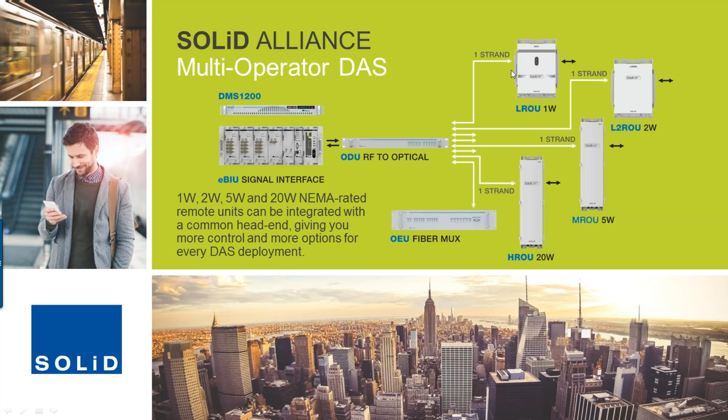This is a teaser for those of you who are familiar with Solid. This is a very, very preliminary spec at this point. What we're trying to also do is continue to evolve, as I mentioned earlier, and one of the common feedback that came out from the industry was about higher power amplifiers. So Solid is working on potentially coming up with a 40 watt amplifier. This might be a lot of exciting news for many of you who do outdoor type or campus type deployments.

You would be able to sort of mix and match the 20 watt and the 40 watt amplifiers within the same chassis. And since this is in very preliminary stages, we would love to hear your feedback and your needs as to being able to utilize the solution and what sort of additional feature sets you would like to see in this product. So more to come on this one. Stay tuned. This is, as I said, just a small teaser. It's the first time we have publicly shown this. So you certainly will continue to hear more about this as we go on.

So really getting into the meat of the presentation today, understanding how to deploy hybrid DAS and what are some of the considerations we need to pay attention to. Obviously today DAS has become a very complex ecosystem where there's different needs from addressing the capacity, addressing the coverage, understanding aesthetic concerns, understanding the amount of power needed, space. So all of these concerns really go into when a design engineer starts designing a DAS on paper, to be able to take all of this into account and not just simply look at power levels.

So there's a lot more that's going on in today's world, and one of the reasons that we're looking into hybrid DAS today, which have been much more cost efficient, is some of the things that we have learned over time. So let's talk a little bit about and understand some of the systems today and how they're basically set up. So in order to visually understand it, here's a sample, and this is courtesy of Omnitron.

Here's a sample of a university campus where all the purple or blue nodes that you see are basically outdoor nodes. As you can see, they cover a pretty good swath of the campus itself, but there's still a lot of coverage holes pointed out by the orange or the red shading in some of these buildings. So while we have been able to cover a good portion of the campus, there's still a lot of gaps that need to be addressed. And as you can see at the bottom right, the green represents good coverage, the yellow fair, and the red poor coverage.

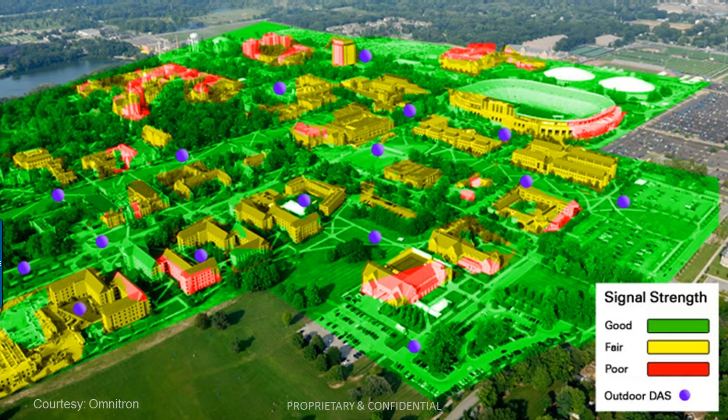So one way to perhaps do this is, what if we augmented this existing outdoor DAS with some indoor nodes? And that's what this next slide shows you. So all the little orange dots that you see are indoor nodes augmented inside of buildings. As you can see, in a very typical campus environment, there are a lot of buildings that are very small to medium size, barring maybe a large stadium like this. So for us to go ahead and put an indoor node in every one of these small or medium buildings might be cost prohibitive.

But if we were able to mix and match it, where we were able to cover some parts of the campus with outdoor nodes and some parts of the campus with indoor nodes, it really will make your solution seamlessly transition between traffic and also from a cost standpoint. So as we start to see more and more of these multi-building campus type environments, the hybrid DAS approach seems to be the most effective from a lot of different scenarios, and those are some of the things that we will talk about right here.

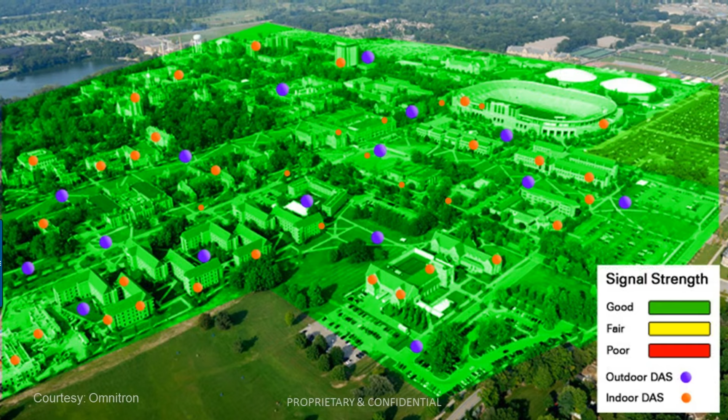Okay. So why hybrid DAS to begin with? So multi-building campus environments, as I just mentioned, have a large mix of small, medium, and large buildings. This is very, very true in campus environments, whether it's an urban or a rural campus environment.

Deploying an indoor DAS may not always be the most cost-effective, simply because in a lot of these buildings, which are typically decades or a few hundreds of years old, especially in a lot of the older college or university campuses, there's not a lot of space in these small buildings. And for me to put an indoor remote in every one of these buildings might require a lot of them. Large university campuses could have upwards of 50, 60, 70 buildings, and to put in a remote unit in every building and every floor may simply not be cost effective.

Due to the highly transient nature of traffic, for example students who are typically in the dorms in the evenings, in the classrooms during the day, and perhaps at the stadium during the weekends, simply cranking up the power to cover every inch of the facility at every point all the time may not be very effective. So in order to increase the efficacy of deployment, and to model the transient nature of people moving from location A to location B to location C, mixing indoor and outdoor nodes will really help spread coverage costs, and you're going to extract more bang for the buck.

Now, having said this, at Solid we continue to build large campus environments with completely indoor DASs as well. We've covered campuses that are 13, 14 million square feet that are completely indoor covered. There are a lot of reasons why certain campuses are covered a certain way. But again, Jim could talk to you a little bit more about some of his experiences as he shows you a demo later in this presentation about a couple of campus environments where they were looking at a mixed indoor-outdoor, and that saved them millions of dollars in deployment.

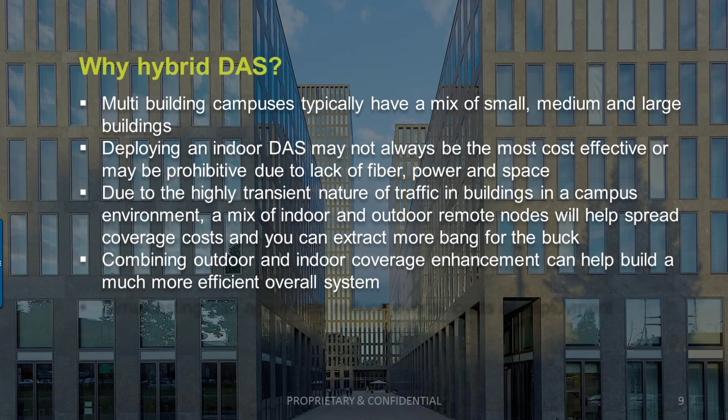But overall, when you're combining an indoor-outdoor coverage enhancement type solution, partnering with an OEM like Solid, or any OEM that has a mixed portfolio of low-power, medium-power and high-power solutions, can really help make that architecture very seamless. So the end user who manages and maintains the system can truly manage the system from a centralized location, regardless of where the node is and regardless of what the power is.

And simulcasting. All design engineers, and some of you may be on the call as well, probably take advantage of simulcasting all the time. So even in a mixed indoor-outdoor environment, simulcasting can help reduce the overall cost of deployment. If you have a building that's pretty wide, and you put an outdoor node on the east side of the building, the west side may not have full proper coverage, but you can augment it with a simple indoor remote unit rather than cover every floor, every inch of the building. So now you have truly simulcasted from the same sector by covering the indoor building along with the outdoor node coverage.

And obviously, when picking an OEM, you also want to make sure that you understand the physical needs of that product, because being an outdoor node, it has to weather the elements, whether it be heat, like in Arizona, or a lot of rain, like in Florida. These things go a long way to understanding what kind of product you pick before you actually do the design and the coverage propagation modeling.

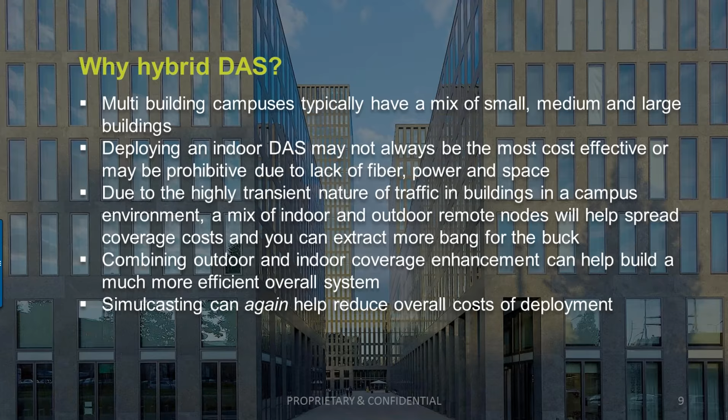So I talked a little bit about the challenges, right? This was just a little idea of us saying, hey, this is the best way to do it, this is a great way to do it, this is a very cost-effective way, simply because we have done it. We at Solid have learned over the years and have done a lot of modeling with only indoor, only outdoor, and combined indoor-outdoor. But it's not bereft of problems. So let's look at some of the challenges of the outdoor environment itself. Number one, this is very basic, but it's also the most common.

The availability of fiber, power, and space, or pretty much the lack thereof. Most cases, you don't have fiber running out to all parts of the campuses. There's no power, definitely, and space is also a big concern. There's a lot of these issues that we run into over and over again, and there is no single solution for this. Every project's different. Every project's a prototype. So we continue to work through these and try to address some of those concerns before, obviously, the deployment itself.

Aesthetics, another huge concern. Most people here on the call who are part of a venue owner group or who own venues or part of that team, aesthetics is probably huge for you guys. From an RF engineer standpoint, there's a perfect location to mount an antenna or a remote unit. But at the end of the day, that's typically never the case, because you can't simply mount things wherever you want. So whether it's boxes or antennas, because of the presence of these devices or units, it's always going to be a concern. The venue owners always ask us to move these things to different locations.

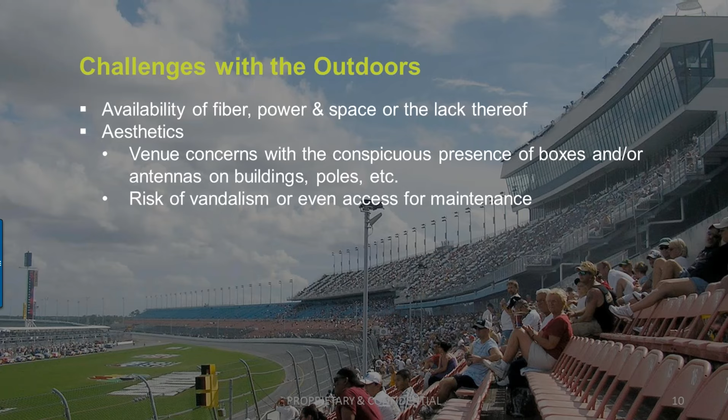Interference, pilot pollution is the other challenge we run into a lot of times. Again, macros have been built out. People are adding more and more towers. Antenna down tilts are being changed in order to provide the different coverage aspects, changing the main lobes. But what that can do from an outdoor standpoint is if I need only 5 watts of power to cover, let's say, an open area of a campus, but because the dominant signal from the macro is so hot, I might now need to go with a 20 watt or 40 watt remote just to overcome that macro. So it could add cost to your deployment, more power requirements, fiber requirements, all of that.

But on the flip side, by putting our remote nodes and our antennas at a much lower rad center as compared to the macros, we will still be able to create that sort of spotlight effect. But you need to be aware of the fact that a lot of times we're looking to get 6 to 8 dB dominance over the outside macro. That can obviously add all these costs as well.

MPE concerns, maximum permissible exposure. Again, the idea of getting the coverage closest to the end user is great. But at the same time, we've got to deal with the fact that now if I'm using a 20 watt or 40 watt remote just to overcome the macro, I've increased the amount of exposure to the end user in a significantly higher manner. So it's something that we have to, again, battle and trade off. One of my mentors says this very well: there's no free lunch in the physics market. So this is exactly it.

You could try to meet in the middle, but swinging too much one way or the other could cause concerns on the other side. So being able to balance that between the coverage, between the type of remote units, between the exposure and aesthetics—these are all some of the biggest challenges.

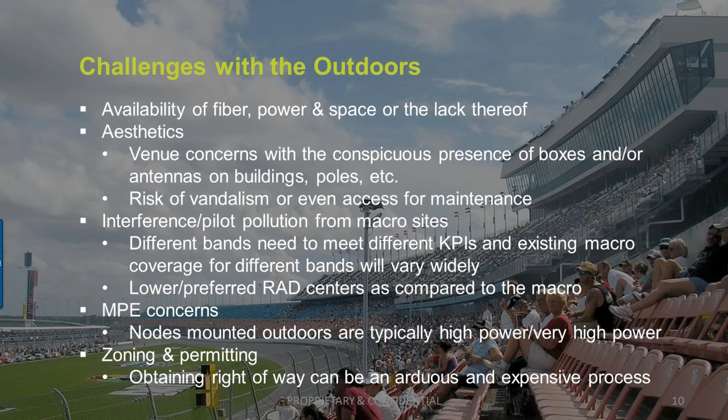So I think we've learned a lot of lessons, and I want to quickly present some of those to you guys. Manage the overall deployment cost by covering buildings from the outside in and then filling gaps with indoor. Again, it goes back to the fact that you don't have to plug a hole into every indoor building, but manage it both from an outdoor-indoor standpoint.

Novel concealment options for aesthetics—a lot of people may be familiar with the company ConcealFab. Another company is 3M, the same guys who make your Post-it notes. They make very good reflective paint that doesn't affect RF. I'll show you on the next slide a couple of pictures of these shrouds or aesthetic options, so we're able to circumvent issues or concerns raised by the venue. These days we're that much more able to put our antennas where we want them, even though the venue said we can't, because we're able to hide or conceal them. So we're getting around certain aspects to not sacrifice coverage while still meeting the venue's requirements.

Benchmarking and optimization—this is always recommended. Very often benchmarking is not done, partly because it's expensive, time-consuming, and requires a lot of coordination. But in order to truly design correctly and deploy and optimize efficiently, benchmarking and optimizing for the entire campus environment before we actually deploy or even design is always highly recommended. In fact, it should be the right way to do it. But a lot of times we go in quickly to cut short the project cycle, and then we're spending a lot more time on the back end trying to optimize these things. So if you have the effort and the budget for benchmarking, that's definitely the right way to do it.

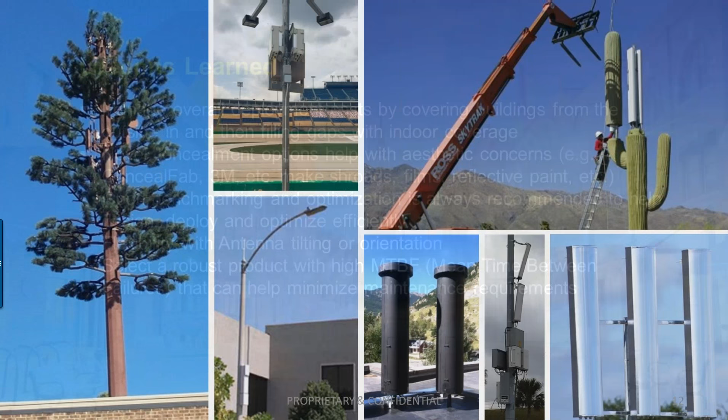So we'll transition into showing you some of the aesthetics we've run into, or some from our partners in the industry. What you see here in the middle is a picture from Daytona International Speedway of our remote units mounted on a pole right in the center of the track. Here's another one from another site, kind of concealed as part of a tree where you can see all the panel antennas. Some of these might be macro, some may be DAS related. This one wasn't a solid project, so I can't comment on that.

Here's another one where you see a remote radio, or perhaps a remote unit, with an Omni antenna on top of this light pole. Here's another one where these look like little smokestacks, but they're actually intended to shroud the remote modules and antennas as part of a campus environment.

On the top right is a pretty common one you might see in the southwest states like New Mexico and Arizona, where the cacti aren't real cacti but are actually shrouding the antennas, whether for a macro node or a DAS node.

And this one I wanted to point out at the bottom right is one by 3M with their reflective film, or reflective paint as they call it. As you can see, looking up from ground level, it blends in with the background sky environment, so you don't even realize it's an antenna unless you really look for it.

So a lot of these novel options are coming about, helping us as DAS engineers meet venue needs from an RF standpoint. Just food for thought on different ways to do it. Not all is lost - you're not forced or bound, because the operator wants all the KPIs met, the venue wants aesthetics met, and you want your system to work. It's a balancing act, but understanding these different aspects can really help speed along the process, and knowing what to expect is probably the most important thing so you can help solve those problems.

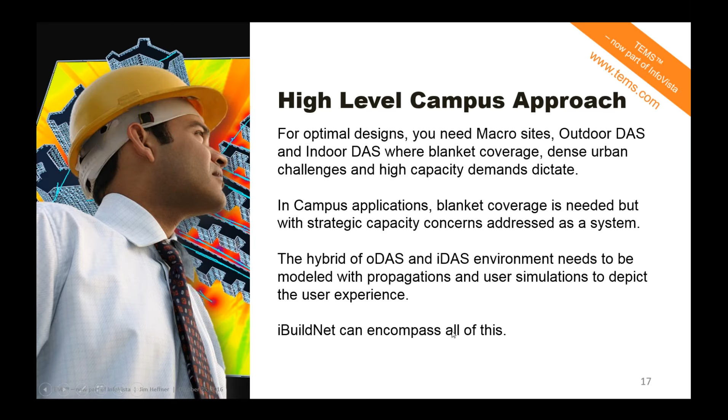As for the demos, let me just jump over here now to jump into this specific one. This is a large city, so when it comes to the outdoor data, you can see a lot of the buildings modeled. In this, where you see this specific grid, we have this building here which we're going to be looking at.

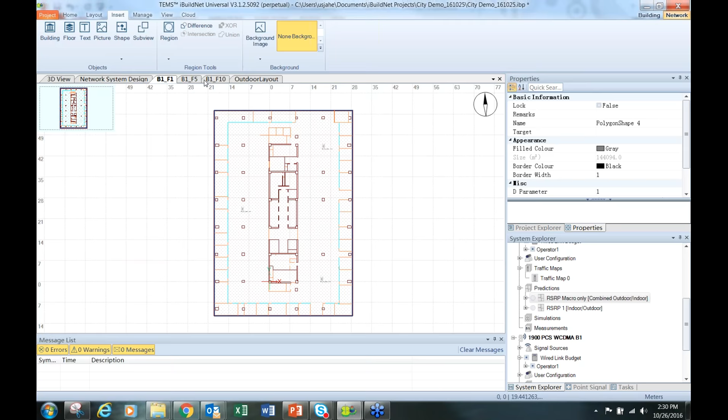So first of all, I'll just jump to a simple floor plan layout. Actually, this specific floor has no indoor infrastructure on it. We do have 3 nodes here for this one, and we'll just jump over to the 3D view.

So for the modeling, we've got all of this city built, which is an intense bit, but it's actually data that can be pulled in from various outdoor data sources.

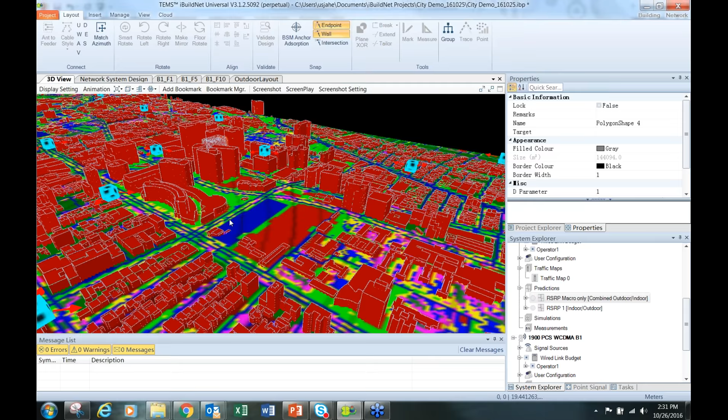And then we'll kind of rotate over to our building. You can see this building here, which is not a solid building, it's actually just modeled in wireframe. When we get in close, we'll actually just throw in our—oops, sorry—bring up our predictions.

So I'll zoom back out for a second. So you can now see what our macro predictions are, and that's what's depicted by these floating nodes here.

And then you can also see from the side how this is permeating in. As it gets lower down, it gets a little weaker, shadowed by the upper floors. If we go to those upper floors, you can see that at the higher ones, it's coming in from the outer edge and propagating internally fairly well. As we go down, it gets a little darker and a little darker. And at the tip of my cursor, you can see what those levels are.

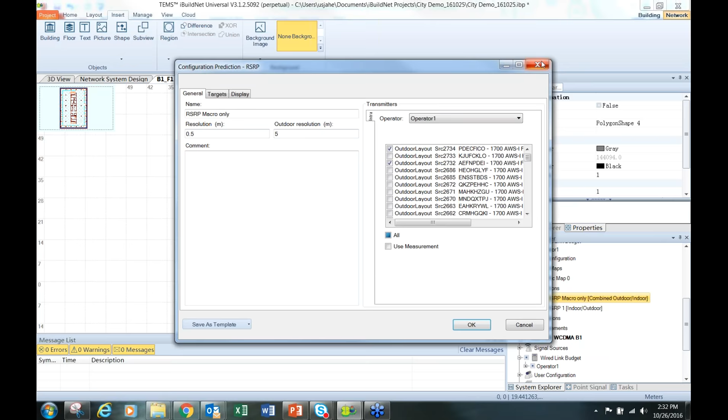Now for the predictions that are created, these are modeled in a couple of different ways. So we have two different resolutions. This here is the resolution for the indoor, and this is the resolution for the outdoor. Because when you're running various predictions, one of the last things you're really looking to do is run a citywide prediction with an RF level at every square foot. It becomes a little too memory intensive.

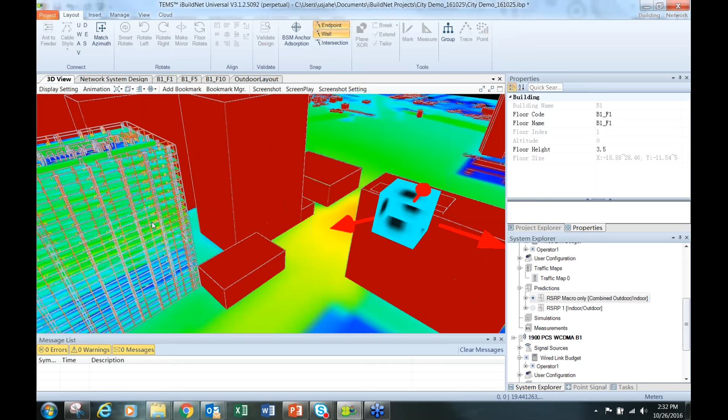So with that, we're able to adjust the macro and give it a relative bin size, and also for the indoor, where you still want it to be specific enough that it's granular and gives you very accurate data, it's able to be adjusted separately. So if we're doing just the in-building, we can model that accordingly and scale it for the macro as well. We can also run the indoor predictions modeled to where that leaks outside.

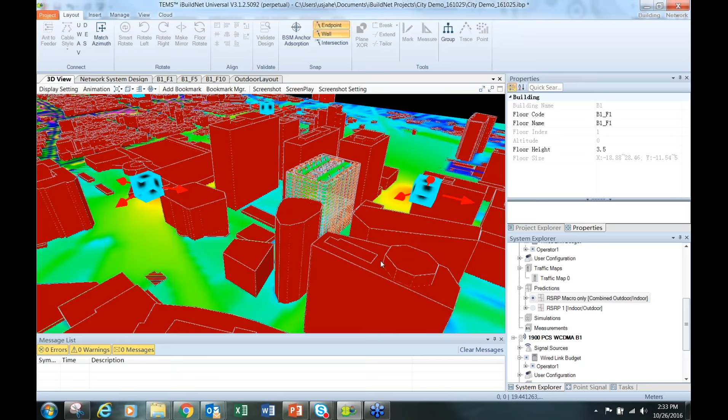And okay, and here. Okay.

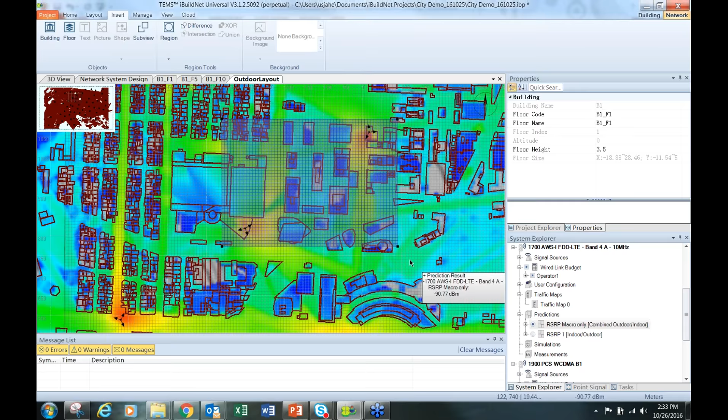Now, in this here, I specifically just ran this specific region, not to put it everywhere, so that you can also relate to that. Let's go back to bringing that in. So you can also scale that out from your macro data. Okay, let's just see what else.

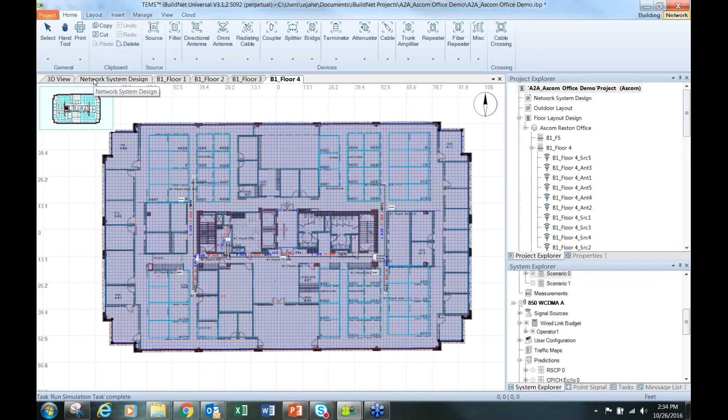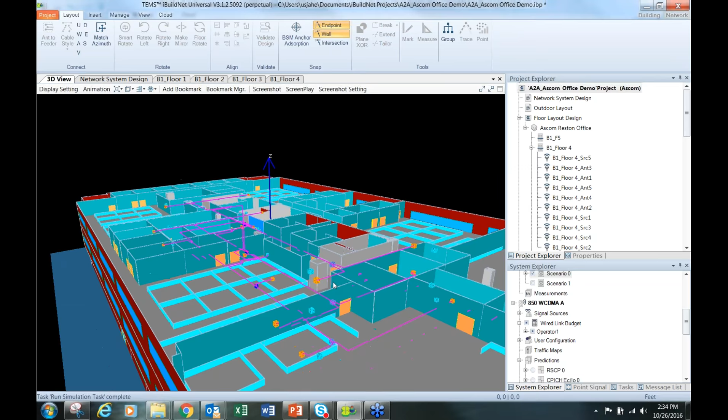And another one I have here as well for demonstration purposes. Now, if you're just looking into your in-building solutions and so forth, yes, you can model your indoor infrastructure, and you can pull it apart for your three-dimensional interests. So if you want to look into it and see any facet of it, you can go through that with pinpointed accuracy as to what's covered by what antenna and so forth very clearly.

We have various predictions here as well to run whatever scenarios are needed, including simulations, which is a Monte Carlo simulation that can then address your uplink users. So in this case here, we'd have a traffic map where we can model adding users and all the various different user types. So heavy download users of FTP, or just simple things like web browsing or video. Obviously, video is going to be a more memory-intensive model.

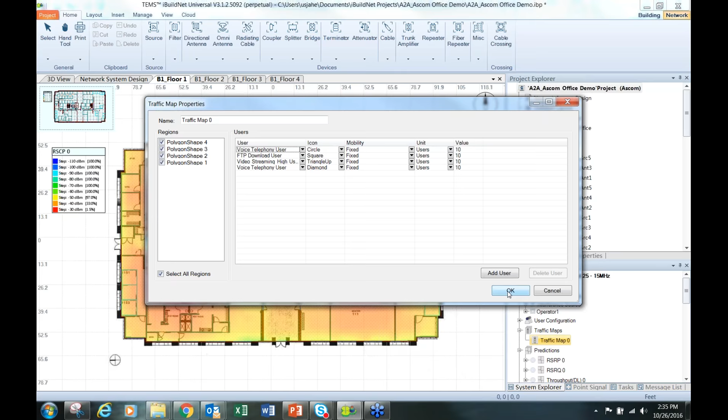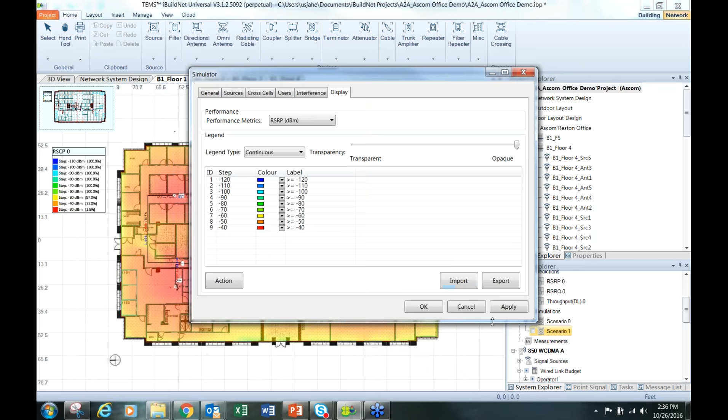And then you can run whatever icon and your numbers of users, and leverage that to run simulations. And then it'll address your uplink and downlink and throughput and various scenarios for those. And from these here you can identify how many different scenarios it wants to run in estimating those simulations, including what sources you want involved, identifying your traffic map, so you have your user scenarios, including your potential interference, and then your displays. So all that can be brought into this.

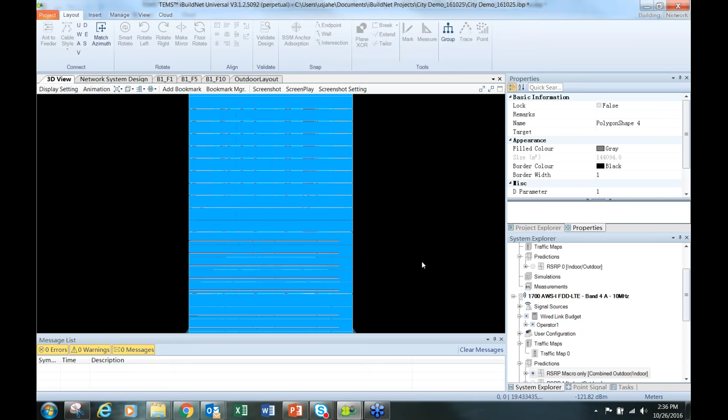We did run out of a little bit of time for this presentation because we were going to run some outdoor simulations for this specific venue, but the time constraints became a little difficult for that this morning. But for this, we can always bounce back and forth and identify issues with regards to the building itself, and then go back to the building. Now again, if I just want to focus on specific parts of that, let's just go down to floor 10 real quick.

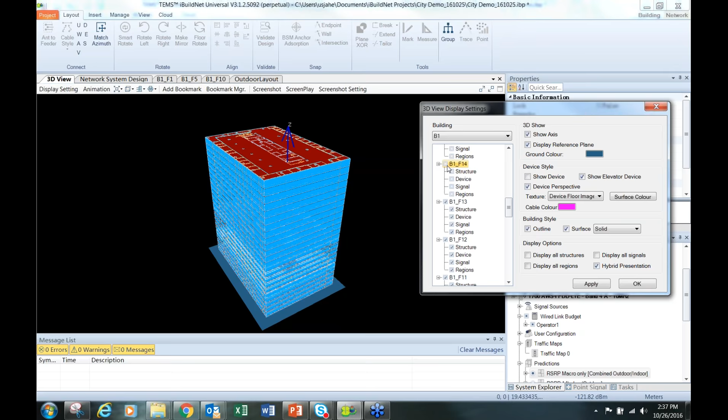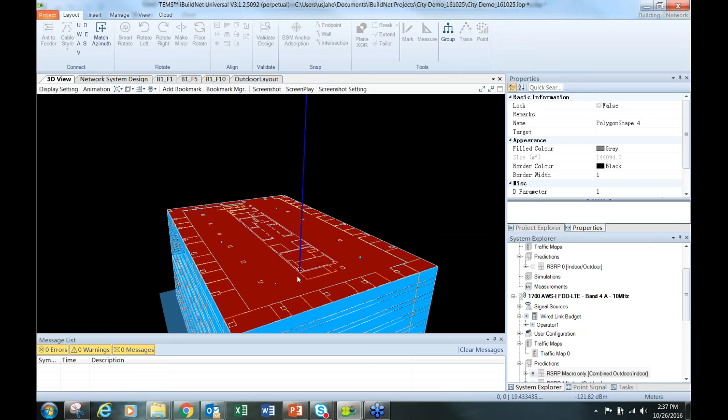Okay, in this case here, we're able to see the three different nodes that we have here. Obviously, these were just transmitter nodes for demonstration purposes, but you can actually pull apart your entire facility as well to see any details, whether you think something's missing or something's not as you wanted it, and you can pull all that apart per floor based upon the structure, devices, signals, regions. So in case I wanted to bring back in my, I believe it was the AWS band.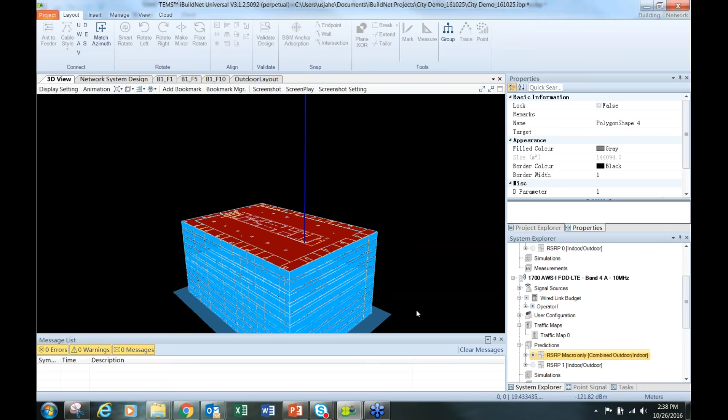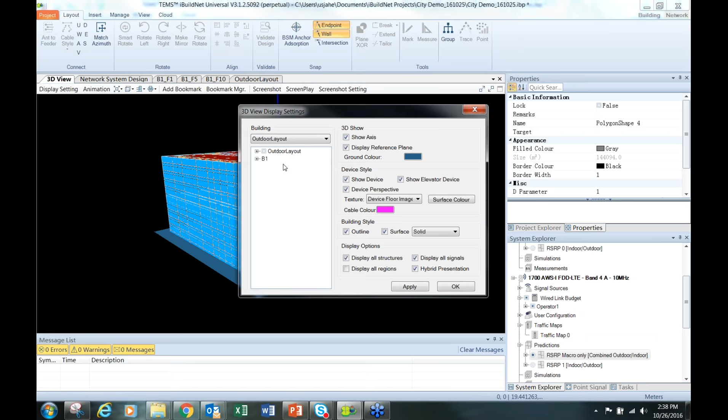Okay, we'll go back to that on here. So this is all the indoor leakage coverage. But as for how this applies with regards to your outdoor to indoor, you don't have a lot of limitations, where a lot of times before you might have your Planet or so for your macro data usage, and then you might switch to another tool for your in-building, where this can give you the option of applying both to one solution.

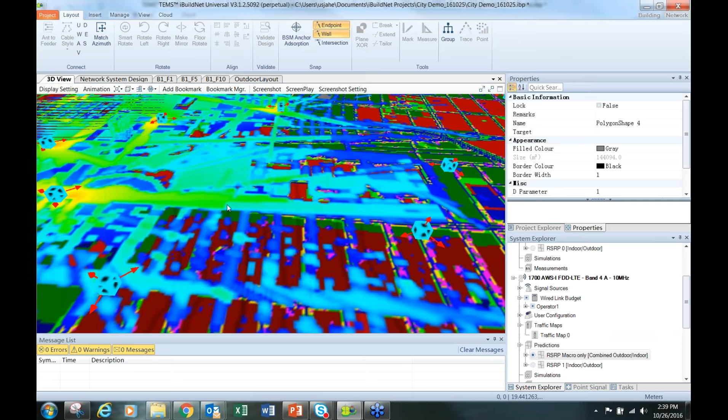Now, just like here, you see a very big gap between these. That's just because this is estimated average mean sea level, and this is the elevation of this area. It just happens to be a higher elevation location. And when you bring in something with this much data, initially my building shows up. The other buildings are loading at this time because it is a little memory intensive for projects of this size.

But I guess that's the majority of what I was looking to present today, and we'll just hop back to this here and jump into a little summary. When it comes to the balance between indoor and outdoor, there's been numerous systems, at least in the Northeast, where certain marquee campuses have been wired for different carriers, where it's ranged up to like 25 million to complete the project, where they approached everything from the indoor model.

And then later that transitioned pretty quickly to scenarios where you would approach your outdoor from more of an ODAS node. You don't want a bunch of macros all 3 blocks from each other, creating massive pilot pollution, where we'd find lower level roofs to still cover the few blocks that it's trying to target, and also potentially penetrate buildings from the side.

And then after they're strategized and so forth, the amount of in-building wiring that needs to be done can come down. So all of the costly cabling, or from the cable company's perspective, it's that last mile, which is always the highest cost one, which there's many more of. That part of it is able to be controlled a little better by doing the hybrid.

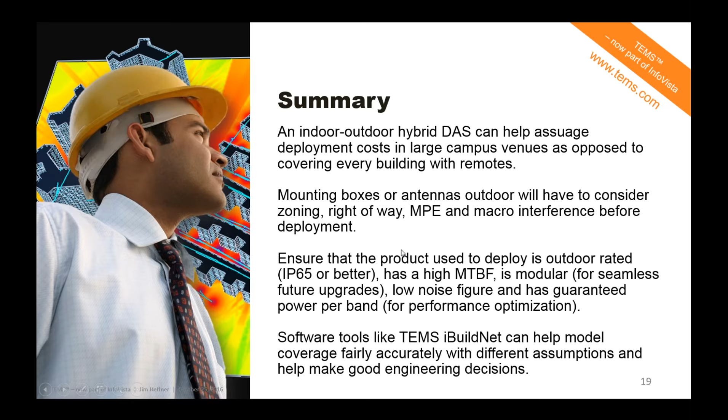Lexman, did you have any other points that you wanted to note? No, thank you, Jim. I appreciate you sharing your valuable insights using TEMS iBuildNet. There have been a few questions that have come through, so I'm going to try to answer them as much as possible, and have Jim share his thoughts on things that are relevant to him.